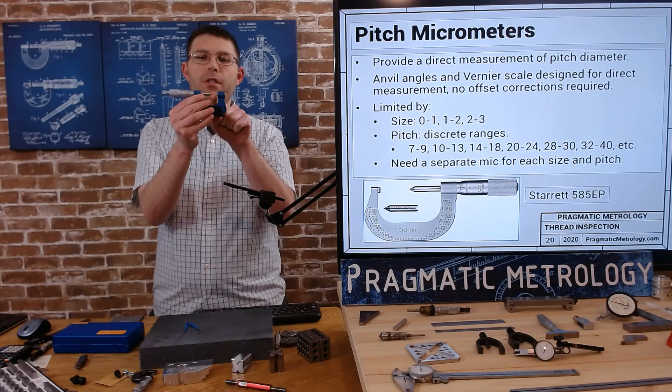So there are angled anvils in here that allow for the 60 degree thread to sit inside the anvils and take a measurement. They are limited by size and by pitch usually, so if you don't have the interchangeable style like I have today, each one of these anvils is going to be limited to a 7 to 9 pitch, 10 to 13 pitch, 14 to 18, 20 to 24, etc. And you're limited by size, so go from 0 to 1, 1 to 2, 2 to 3.

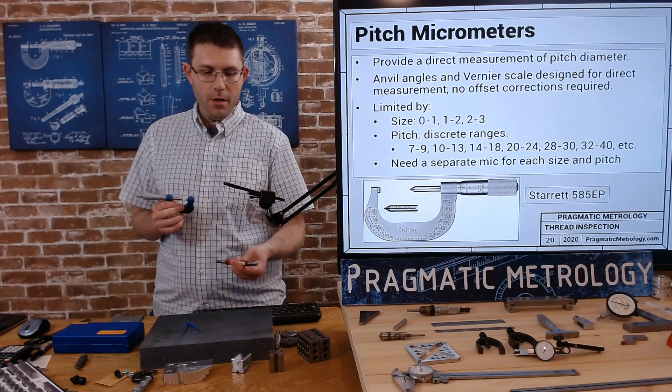If you're going to want to cover every single size and every single range, you're going to need a lot of micrometers. Or your other option is to buy the interchangeable anvil style, which I'll show you in a minute or so. When you do get larger than a 0 to 1 pitch mic, it's going to come with a standard, like you see here. And this standard will help you set 0. For the 0 to 1 mic, you can close it and check for 0, like a standard micrometer. And if you want to check against a known and calibrated plug gauge, that's one way you can verify everything is correct.

So let's take a look at this micrometer that I'm actually working with. It has a set of interchangeable anvils, so I can handle all the different pitches with just one size of micrometer. And it's a little bit more economical that way. You don't have to buy as many micrometers. Not quite as accurate, to be honest. It really depends on the maker and the manufacturer's specs, but the interchangeable part of it tends to add a little error. I'll try to show you what these interchangeable anvils look like if I zoom in on one.

So let's try to zoom in. You see that size, 64 to 48 pitch. So 48 to 64 pitch on the right side, and it also has a metric pitch, 0.4 to 0.5. So a very small pitch, and then we can go larger. See if the camera will, there we go. What is this? Should have read it first. 5 to 8 threads per inch. So you can use this anvil for anything between 5 and 8 threads per inch. Or metric, looks like 3.5 to 5.

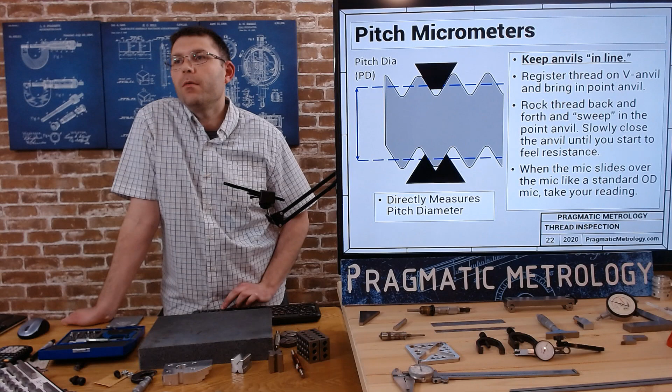Now, what's similar to a pitch mic is you can convert an OD mic into a pitch mic with these attachments here. So you can buy a little ring that will slide onto each anvil, and then that ring will also hold onto a similar style anvil that I had for this pitch mic that I showed you. And that will add some thickness to your OD micrometer, so it will no longer be a direct reading. But typically, you just have to subtract whatever thickness was added, and that is controlled by the manufacturer. They'll be able to tell you. It's usually a very simple subtraction.

Same thing for calipers. If you want to work with a caliper, there are caliper attachments that you can put onto your caliper and then add these thread anvils. Now I want to say definitely with the caliper, this has got to be for reference only. There's really no reasonable way to do this accurately. If you are going to be using calipers, if you can measure something that you know has a certain pitch diameter before you measure your part, that's one way to be a sanity check. With the OD mics, it's a little bit more stable. We often attach things to OD mics to give them different shaped anvils, so I trust that a little bit more. But the caliper is nice because these attachments can be for internal or external threads, which is cool. I like using them, but I use them for reference only. So just keep that in mind.

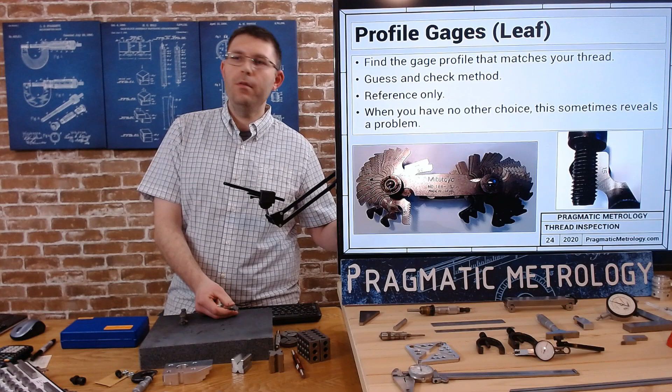So you'll hold up the gauge into the leaf and check for a profile. It's pretty much guess and check, when you have all those options and you fan them out. But it's not too bad. Generally speaking, I'll eyeball what I think looks closest, then I'll know right away whether I need to go lower pitch or higher pitch. So let's show you how that looks on this bolt. I already found the 16 pitch to save time, but if I tried a bunch of other ones, I'll fan them out.

Let's say maybe I thought it was a 13 pitch to start off with, and you try to hold it up. Let me get a white background so you can see a little easier. I try to hold it up and you still see quite a bit of light there. It doesn't want to match. So we'll try the 18. Yeah, this is the 18, and you'll see I've gone a little too far. So I need to find the 16 and show you what it looks like when it's just right, just like Goldilocks. All right, so when we have a 16 and a 16 pitch, it'll fit right in there perfectly snug.

So these gauges have a certain length to them, and you should try to use the entire length. There are sometimes cases with coarser threads or finer threads actually. With finer threads, the difference between like a 40 and a 44 may be really hard to tell without using all of your engagement. So try to use all of the gauge and not just hang off on a few.

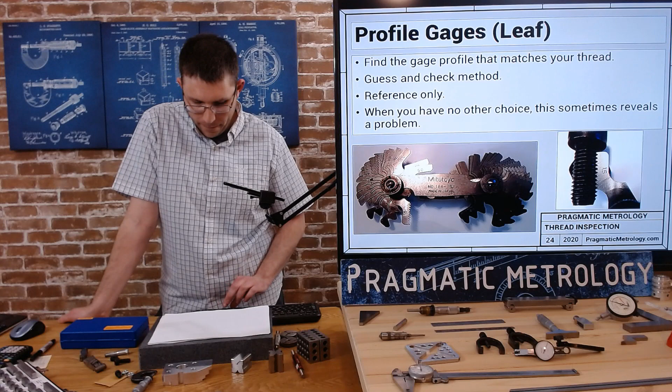Now we're going to take a little aside. When you need to measure the depth of a threaded hole, we could talk about this in the hole inspection topic or the thread inspection topic. We're going to talk about it here since we are talking about threads. To get the depth of the hole, sometimes the depth might need to be 1 inch down or a 1/2 inch down. And you need to measure how far it went. It can't be shallow and it can't be too deep.

Generally speaking, you have 1 or 2 turns or like a 64th. I can't remember. I could look at our drawing. Yeah, 16th. That makes more sense. You might have a 16th of tolerance. Generally speaking, if it's a blind hole, you don't want it to poke through into another feature. But for assembly purposes, you're generally a pretty open tolerance.

But as you can see on this bolt, I had to modify it. So I ground the lead in off. Bolts usually have that round lead in, and I've ground it off so that it's perfectly flat, and I can really know exactly where the thread stopped. I also ground off the bolt head, because this bolt happened to have a bunch of markings for identifying the bolt from the manufacturer, and they weren't allowing me to sit flat or to measure a caliper across it. So I just ground those off.

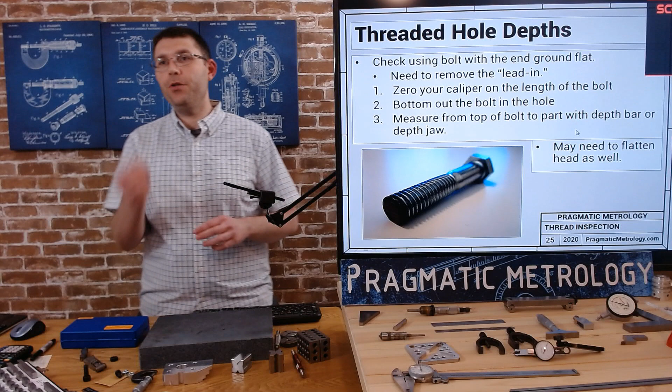With a cap head screw, they generally sit pretty flat. All the markings are below, so you may want to grab one of those if you can. But how we use this ground flat bolt on both sides to measure the depth of a hole: essentially, we're gonna zero our caliper on the overall length. We're gonna thread the hole in, and then we're gonna take a reading with our depth bar. And doing it this way will give us a direct reading of the depth. So let's do that with our angle block.

Here's our angle block. So first of all, I'm going to zero on the length of my bolt. Okay, zero on the overall length. I'm going to thread into the hole, and this is supposed to be a through hole. However, the manufacturing process seems to have left a burr because I can no longer easily thread that in, and it still hasn't poked through. So we're going to see how far it went before the burr stopped it.

I'm going to grab our caliper, and now I'm going to bring it down, and it's down at a depth of 0.929. So because I zeroed on the length of the bolt, and I'm measuring the piece that is missing, it's basically telling me the piece that's missing, not the piece I'm measuring, because I'm not zeroing when it's closed. I was zeroing it on the length.

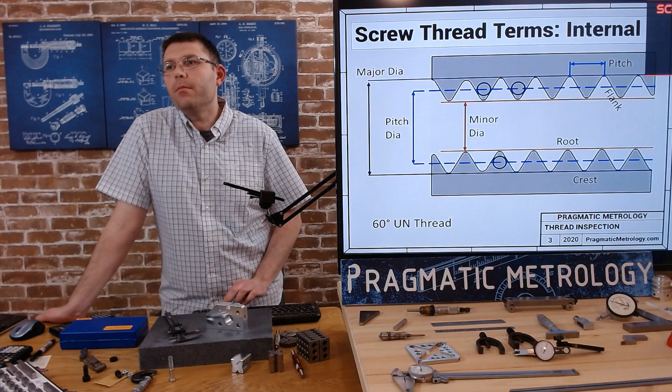Oops. All right. We're almost wrapped up. I'm going to give you a quick reminder: as a reference tool, a bucket of bolts and nuts, if you know what they are on the shop floor, can help you quickly tell if the bolt is going into the hole, if it's the right pitch. If the bolt doesn't go in, odds are it's out of spec already. So a lot of people will keep these around and use these as in-process gauges, and then when they're finished with their hole, they'll check it with a practical thread gauge.

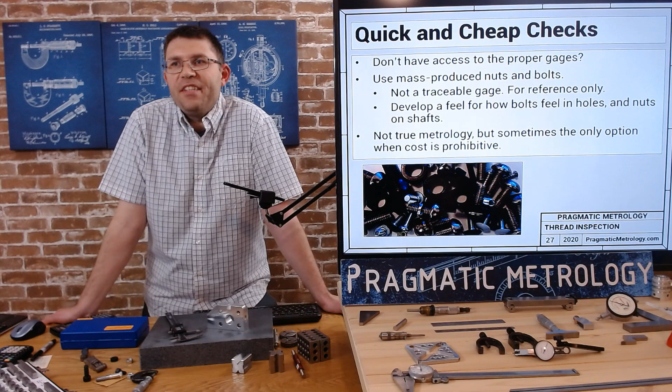Same thing with a nut. It's very cheap to get these. It's very expensive to get the ring gauges. So they might be checking with a nut for a while and then use the ring gauge as needed. It's something to be aware of. It's not precision. It's not traceable. It's not something you can put on an inspection report, but it is something you should keep available to you as needed. And then we're going to wrap up with a quick bolt and nut identification reminder.

So in order to identify a bolt, you're gonna do the major diameter with a caliper. So this major diameter is 0.366, 0.367, and you're going to have to round that to the nearest fraction. So 367 is pretty close to 375, and in the world of finite bolt sizes, it's a 3/8.

For the leaf gauge, you're gonna use that to measure the pitch. So we already measured the pitch of the bolt. You can use the same thing on a nut if you don't know what pitch it is. You can use the leaf gauges internally. It's a little harder to see, obviously. And then for the length of the bolt, you're gonna take the length of the bolt without the head. So I'm reading 1.945, and again, you have limited bolt sizes. I would say that's about a 2-inch bolt.

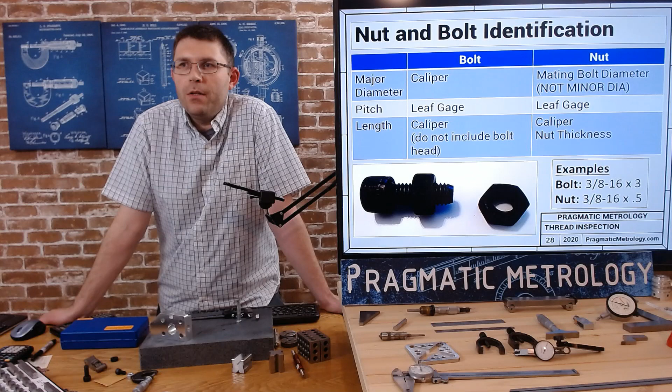So the trick for that is don't involve the head at all. All we care about is the length of the shaft. For the nut, it's pretty much the same, except you're going to caliper the nut thickness for the length, 0.328. I might also round that up to .375, which is 3/8, because of the finite number of bolts that are available. But the key here is the nut major diameter.

You can't measure the major diameter of a nut. The major diameter is on the inside of the material. You can't get anything there. So in order to identify the major diameter, you're basically just going to find the bolt that goes on, and you call that a 3/8 nut because a 3/8 bolt went on it. That's also a quick way to identify the pitch as well if you already know the bolt and the nut.

It's tricky at first when maybe you need to identify a nut or a bolt that you have in the shop to get a replacement, and you want to order the right thing. So just a quick reminder. And then we're gonna close up with a quick discussion on NPT threads.

NPT threads are tapered. So with a tapered thread, when the male and female taper go into each other, they always stop because of the way the taper is set up. So it's great for sealing a liquid or a gas. You're probably going to need thread tape anyway to help seal it, but it's much better than a parallel thread, a straight thread. You can't really seal with those.

But when you're using a plug gauge and a ring gauge, because these threads are tapered, standard plugs and standard rings no longer apply. You're going to have a tapered plug and a tapered ring, and each one of those gauges on the plug side is going to have a flat. And if you pretend that this is a tapered plug gauge, this one has a flat for other purposes, but when you are cutting your thread, you're looking for the flat to be close to the surface.

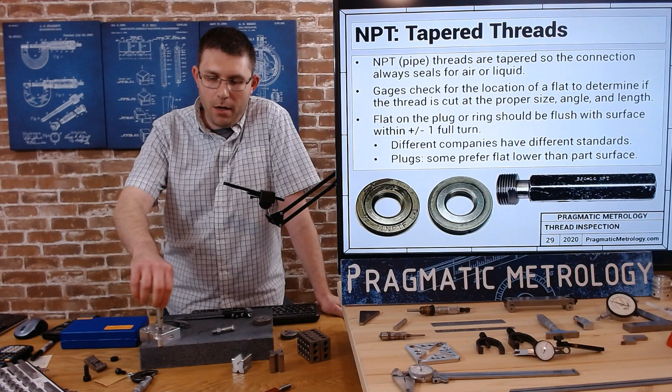And generally speaking, you have one full turn plus or one full turn minus. Sometimes you have less than that, so you may have to get an indicator out and run it across the flat and across the top. But most of the time, NPT threads are kind of open tolerance, and a full turn plus or minus is a pretty big tolerance for a lot of NPT threads.

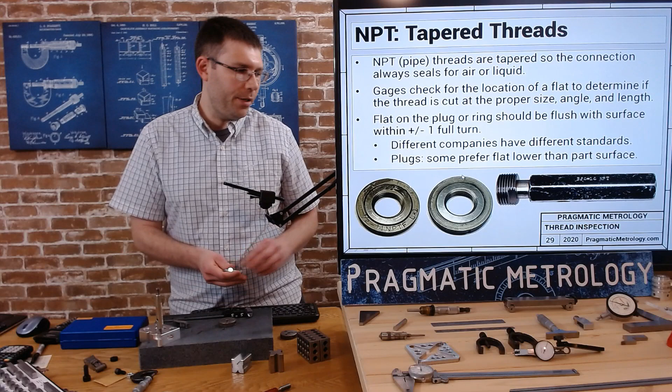Same thing for a ring gauge, but instead of having a cutout, you're just looking for the thread to be flush with this surface on the top. I wish I had a gauge to show you, but if you were to pretend that this nut were an NPT gauge, you're looking for the finished part and the gauge to end up flush. Clear this out.

Okay, so you're looking for a flush, not sticking out and not too deep, but within a turn plus or minus, or whatever tolerance the print requires. Sometimes it's less than that.